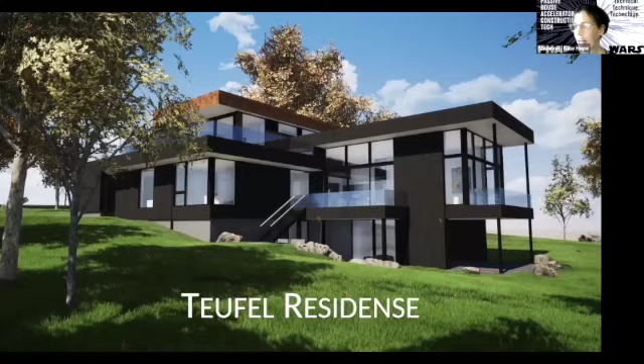Anyway, so this is the Teufel residence. This project started, I guess, about a year and a half ago or so.

And the client who originally came to us was from California and wanted a sexy, modern Southern California design, not typically done on the East Coast or somewhere where you actually need to heat a building, in Pennsylvania. And so he reached out to us because of that image you saw earlier, which was a past project that was not a passive house, but we still implemented passive solar strategies, even though it was a ridiculous amount of glass.

But anyway, so the Teufel project, the main driving focus here was modern, innovative, sexy design. And so that's what the client came to us for. And we slowly started the sell on sustainability, energy efficiency, comfort, durability, and really thinking bigger than just the simple strategy of sexy and modern. And so our goal was to take that sexy modern strategy and turn it into something that was passive house or something close to it when we first started the project.

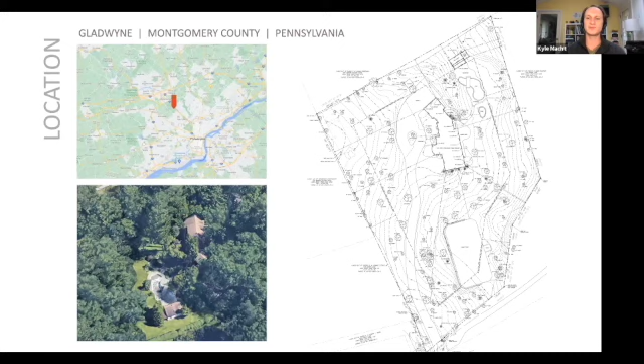And so this project is located just west of Philadelphia, sort of northwest in Gladwyne, which is somewhat of a wealthy community. And the client found a piece of land there that had an old large home on it. And that home was kind of nice, but nice from the 1970s. So we were first brought in to look at that existing property and that existing home and sort of evaluate it: is there anything worth saving? Is there anything worth considering differently here than just tearing this down and starting over?

The client fell in love with the site pretty quickly. Fortunately, all these pictures are from fall, so when it's all green and beautiful, it looks a little bit nicer than this. But anyway, so we were first brought in for pre-existing conditions, and then I got to throw on that energy consulting hat that I started with Norm, who's in the audience. And so I was able to go in, sort of dissect this house, and pretty quickly come to the conclusion, all right, there's a lot of water issues, that musty smell as soon as you walk in that door.

It's going to take a lot of work to try to revamp this to make it the modern palace that the client wanted. Maybe take it down to the foundation, but the more we analyzed it, the more we thought it wasn't worth it. And what we decided to do instead was deconstruct the home. So we had multiple different parties come in, take out what was salvageable, strip and gut the whole inside, and then deconstruct it appropriately and recycle what we could. And that ended up being a big tax write-off for the client. So even though it took a little longer to do that, it was worth it.

And then we were brought on in full architecture mode for the preliminary design. And so in this process, a lot of time to explore. This client was great because he gave us that flexibility to really try different things, try different designs, got out some foam blocks and really played with a lot of different ideas. And then from there, we went to schematic design. And this is where we started really thinking about how are we going to execute this? How are we going to get to somewhat passive house-ish, I keep saying, and get closer to that.

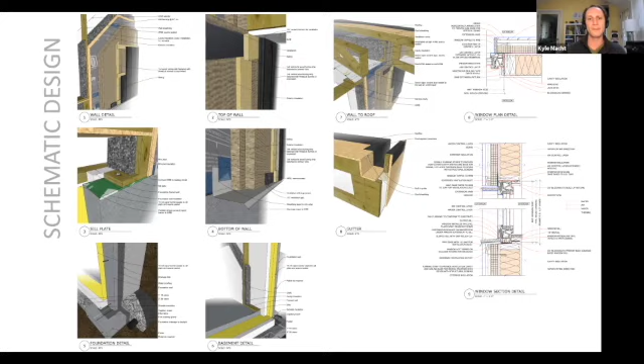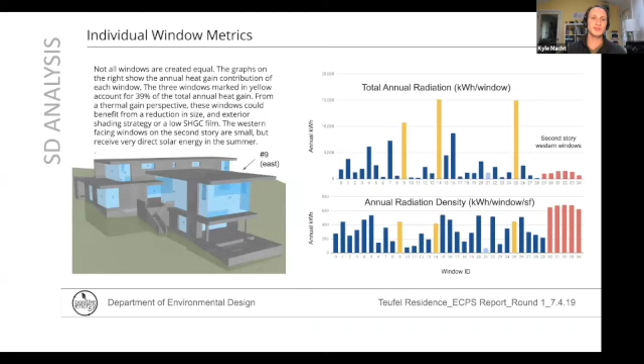At this point, we also brought in Positive Energy, who were the mechanical and plumbing engineers on this project. And they did a whole bunch of different studies for the project, looking at how the trees impact the windows and shading analysis, insulation, looking at glare studies and all different types of lighting studies. And so they were really helpful to try to fine tune some of the project to make things work and perform a little bit better. Luckily, from our past experience, we were getting pretty close to that optimal performance, and we could have tweaked a lot more things, but to get the design the way we wanted to, we were pretty close. But they were really helpful.

And so getting into design development, we've got this amazing project, and the more people we're bringing in, at this point we had Hansen on as the main builder, and we really wanted to make this project something better, something more unique, something more progressive. And so talking to the client about embodied carbon, the client was all for it, but wasn't really interested in paying that much for it. And so how did we manage that? How did we try to reduce the embodied carbon as much as possible without increasing the cost too much or at all? And so that was one of the big things we started talking about.

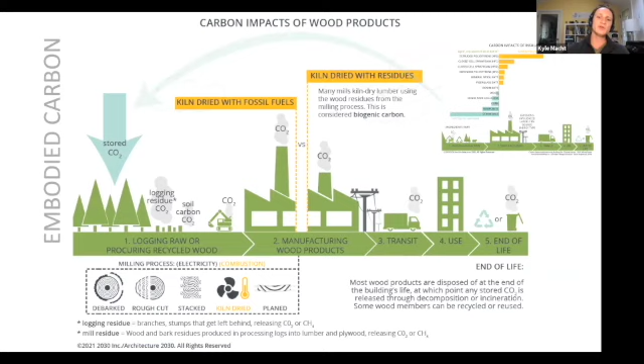And we went to the Passive House conference in DC, I guess that was a year and a half ago or a year ago or so. And in that same room with us was Steve and Ilka, and they did a presentation on embodied carbon. And we were interested in potentially working with them and bringing a panel manufacturer in, which I'll get on in a second. And so that presentation was sort of like, yes, we really need to think a little bit more progressive about this.

And so the conversation came up from a builder and from us and the client. Everybody sort of seemed intrigued by, what if we panelized this? What if it was all built in the factory and brought on site? And so one of the main things that really got me excited about that was carbon reduction. And so we looked at, what if we panelized it? What if we built it on site? And we had a lot of trouble getting FSC lumber from different local sources, even shipping it in. It was either really expensive or difficult to source. Going panelized, super easy.

Most of the people that we were talking to about the project could do that, and it was part of their process. Wood fiberboard, also part of the process. That was something we wanted to start doing instead of the mineral wool, to reduce carbon emissions and still allow that vapor drive or vapor drying to the exterior. And so we really started getting interested in this.

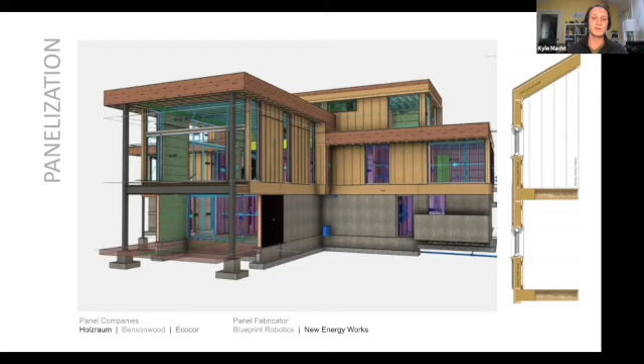With this project, we ended up using hemp batt insulation. And then on the outside, a 60 millimeter Steico, the wood fiber board, and then a double layer 1x3 lattice structure. But in between those, we have Solitex Mento Plus for extra durability. And so that is being fastened on with the lattice structure.

And then we have a vertical Accoya wood Shou Sugi Ban siding for extreme durability. That should be a 50-year product. So we are thinking sort of long-term in terms of our material selection there. And the client was also thinking very much about the aesthetics at the same time. So how did those marry together?

On the inside of this, we had our ZIP sheathing, and that is our main air control layer. The Solitex Mento Plus is our secondary air control layer. The ZIP is really our vapor control layer as well, acting as a vapor retarder on the inside, slowing that moisture drive through into the wall assembly. And then if there is any moisture that gets in there, it can all dry to the exterior. Inside that, we have a 2x3 service cavity running horizontally with 5/8 gypsum on that.

So the other big thing, what do we do with the foundation? Concrete. It's so carbon intensive. And so we really started looking at what are all the different options? Do we panelize? Do we do something crazy? And that something crazy usually was not working out. And so we were looking at a lot of different ways. What if we remove the slab in the foundation?

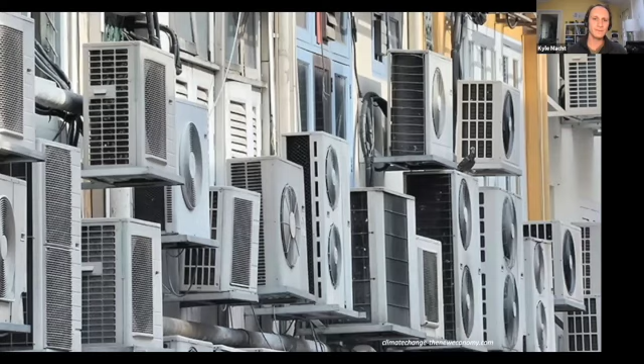The last one, at that same Passive House conference, the next presentation was about refrigerant usage and how super carbon intense it can be. And so we started thinking about that. And in that same room with us were our mechanical engineers, Positive Energy. So the panel company, mechanical engineers, the architects, all in that same presentation, watching that together. As soon as it was over, like, this is the project. We need to do something better here.

What are our options? And the other thing, the eyesore of this, that's why I chose this photo, because it looks ridiculous. And so we were trying to figure out, with a 6-zone mechanical system, how do we do this so we don't have condensers all over the place? Or maybe we needed to create a mechanical pen.

And so all of this started leading us to ground source heat pumps, the thing I normally have been steering clients away from for the past 10 years or so. I think the last one I did before this project was with Norm from Infinity on another project. Anyway, we did some at Infinity with ground source heat pumps. And so we decided to use that for multiple reasons.

One, the big one, all the refrigerant got contained inside this box, factory installed. So instead of a 10% leakage assumed per year, which would outweigh our carbon emissions from the embodied and the operational by a lot. I'm looking forward to finalizing those numbers and that embodied carbon calculation and the whole life cycle calculation. But the refrigerant usage ended up being the biggest carbon emitter for our project.

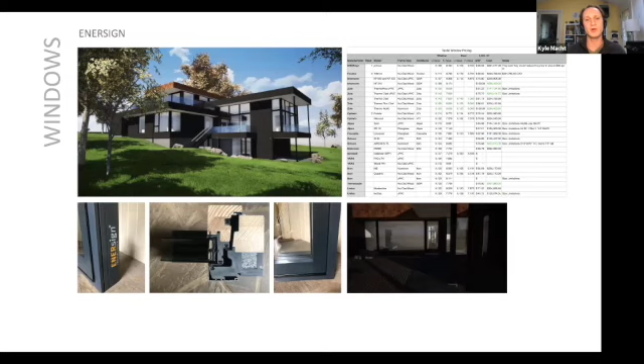which was definitely on the high end, but that was comparing a lot of UPVC and different other, some fiberglass, but most of the wood aluminum clad were in a similar ballpark in terms of price. So we were really happy with this product. I'm really looking forward to installing this. So getting into some of the details, that's what I was really hoping to dive into here.

So at this wall, the other nice thing, we were sort of looking at Superior Wall or IBS. And so with Superior Wall and some of IBS's walls, there's extra steel studs in the wall, and there's XPS foam. And once again, we're trying to remove carbon emissions, and EPS foam is cheaper. So in this scenario, we used all EPS foam throughout the entirety of that panel.

And then for fire purposes and service purposes, and to get a little bit of extra insulation, we're putting all the service cavity insulation on the inside there too, in that 2x4 wall cavity. And we're pulling that off the foundation wall just a ½ inch or so to get a little bit of cellulose back there. And so we're really interested and excited about this detail.

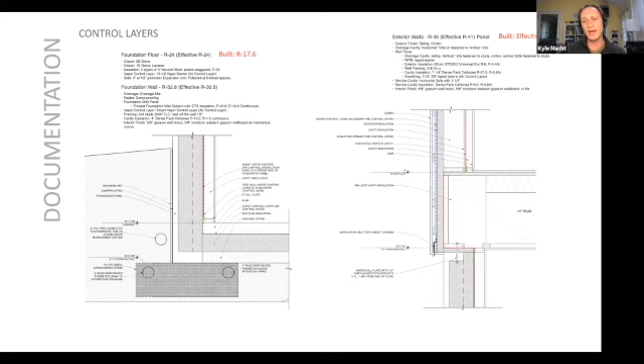So we're really excited about this detail. We'll be executing it soon. And I'm excited to see how that one turns out. The other scenario that we had was on the other side of this foundation. It's mostly a walkout basement on this side. Other side, we have grade going up close to the first floor and up to first floor in some circumstances.

So in that top right image, we realized once you get rid of that floor insulation there, you really got concrete, double sill plate, subfloor, and then bottom plate of the wall above. Sort of a big chunk of wood as a huge thermal bridge there. And so what we decided to do was put 1.5 inches of type 9 EPS underneath that sill plate there, just a continuous layer around the entire top of the foundation wall.

I was talking with the builder, he was like, let's just do the whole thing. It's gonna be way easier to communicate. And so that's what we decided to do. Underneath where all the point loads are coming down, we worked with our structural engineer to figure out which version of Armatherm made the most sense. So we have a little bit of extra coordination here, but completely thermally broken around this transition, which might be a difficult one.

Roof system. This was another one that we really struggled with on this and multiple projects. We have 2 flat roof projects at the same time. And 475, I've seen a lot of their presentations on how to achieve this. Passive House has other ones. And so our goal was to not use any foam inside the control layers, inside our air control layers on the underside of this roof cavity, but the whole cavity insulation is all cellulose. And that was what we were trying to achieve. On top of it was a sloped tapered polyiso.

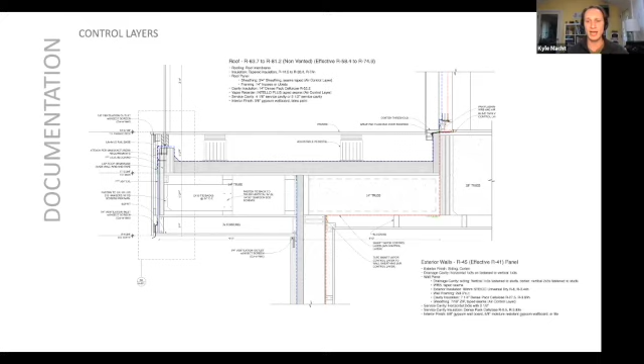We did look at what if we didn't do that and tapered the trusses or tapered the I-joists, which they ended up being, and looked at different strategies there. But after doing some modeling that Ilka was instrumental in helping us out with, doing different WUFI scenarios, these WUFI models were actually done by PHIUS themselves. And this is another little tricky part that we got into, of what membrane to use on the underside of those I-joists there. And so we started out with Solitex or Intello, and that seemed to be what it's designed for. That makes sense. We have tested data from past projects, not ours, but other ones. And then we've also seen a lot of WUFI modeling done.

However, PHIUS changed their modeling methodology, and now they do it just slightly differently, which changes the product selection. And so from their new modeling methodology, they had concerns about the variability of that vapor control layer of that Intello, and they thought it was too vapor closed to allow enough moisture to dry down, because we're relying all on downward drying potential. Some of our roofs, we can rely on solar drive, some we can't. We have a PV system up there, as well as some roof terraces. So we're really relying mostly on drying to the inside.

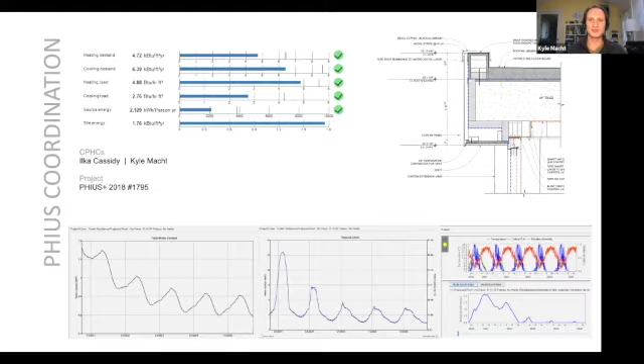And so they wanted us to use more vapor open material. We're still trying to figure out exactly what that's going to be. I'm still thinking Intello makes more sense, but in order to do that, we need to do some other things. So real quick here, we were also looking at how do we extend those overhangs? How do we deal with overhangs? And I'll get more into that in a second.

Window installation, that ended up being a big one back and forth with us and Holzraum and the builder. All of these windows are going to end up being installed on site. Definitely a little bit of a downside, but we were really excited about the possibility of installing them in the factory. This is the typical detail. These are all the non-typical details. Most of our windows actually go floor to ceiling or wall to wall, and they're actually not in a panel at all. They're their own wall panel. And so those we're going to be installing on site. So we talked about all the different coordination, who's going to be doing what, who's prepping what, and how that's going to be achieved.

The other scenario, what do you do at the bottom of the window? So what we've decided is we are going to tape that, and we're going to rely on drying only through Tescon Vana tape at the bottom of that window. That seems to be more the European methodology. Building Science Corporation might poo-poo that, but we're using a really high quality installation, really high quality window here. If there is any moisture that gets down there, it will be able to dry. If there's a leak, that will not be able to drain as easily, but I'm not too worried about that.

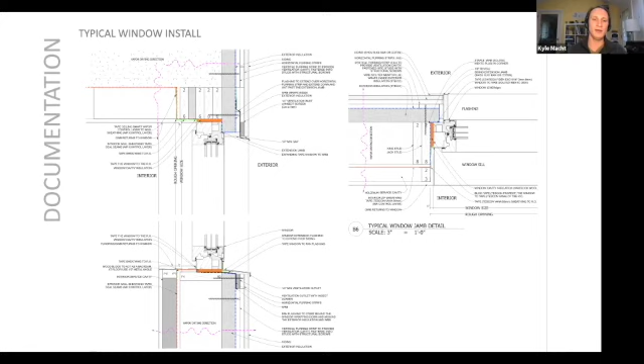Another reason why, we have 4-foot overhangs meeting this window in most scenarios. You can see that in the bottom right there. Most of the time, our windows are going up to a soffit. And so there's really minimal chance for a lot of water penetration in these windows. Where we are having a window without an overhang on it, the plan is to maybe put in a vapor diffusion port or a little drainage port, sort of like a weep hole that we're taping around, to allow that excess potential water 50 years from now to drain out.

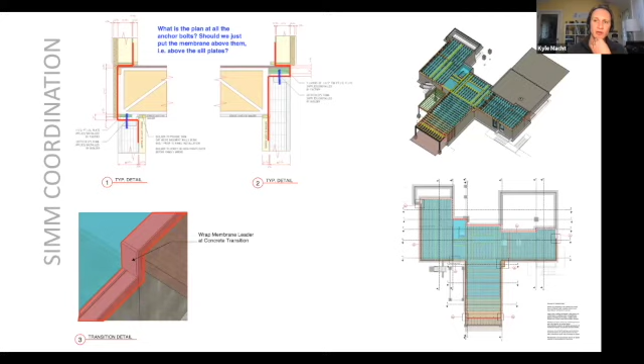And so working with Holzraum, they went through their entire process of how are we treating all these details? How are all these different systems connecting? Where are all those control layers connecting? And so Ilka was instrumental in that, and so was Steve at Holzraum. And so we worked together pretty thoroughly on all of these details and figuring out all of these different conditions.

This was another one that sort of came up, is how do we do all these big overhangs? How do we deal with those penetrations in our control layers? And so we were worried about thermal control layer, air control layer, vapor control layer, and the water control layer there. And so water control layer we're bypassing, and that's wrapping around the parapet, and around the overhang there. But our primary air control layer was on the inside, on the underside of our roof system. So that was bypassing any type of point load through it.

However, our secondary air control layer was the roof sheathing, and that can carry down to the outside of the Solitex Mento. So how do we seal between where 2 layers of LVLs are coming together? Do you core and fill? Do you squeeze some Contiga between those, some type of acoustical sealant? And so that's what our plan is to try to seal right at that penetration.

Secondary air control layer, but still a concern, still something to keep in mind. Other option was to tape around the entirety of that LVL protrusion there and sort of include the whole thing. But our goal is to just try to fill between there. We'll see how that works out in the blower door test.

Also, a little bit of steel in the project. We've really tried to limit the usage of steel. We have basically just 2 steel beams left and 1 steel column. Everything else we were able to get down to wood. When we first started in schematic design, there were like 10 steel beams in the project.

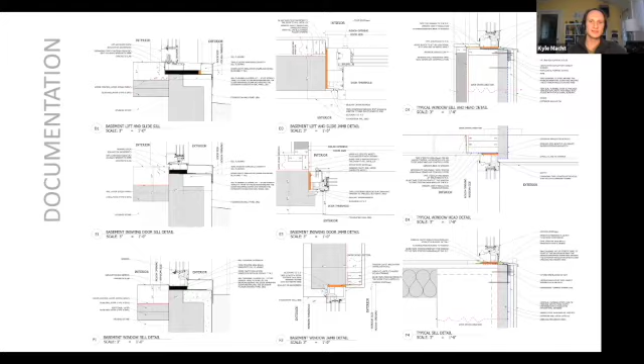We knew this one was an issue, and this one was the one we were just going to say, it is what it is. We'll throw a little bit of extra insulation potentially underneath that double LVL there. Some places it's not quite a double LVL and it's a little bit more, so definitely a concern. But we're gonna make sure we mitigate that as much as we can.

I wondered because it looked like from your thought process you were identifying these and approaching them before you probably were asked to look at them. That's absolutely correct. This exact condition I was thinking about in schematic design, of how we're dealing with these thermal point loads, especially the overhang. And in all honesty, we had another project similar to this that we designed right before this, not passive house, but going close to it. And so we were dealing with some of those conditions here.

So we were sort of primed for this in this project, of how are we going to deal with these big overhangs and how are we going to do it in the best way we can to not increase cost, make it not too complicated, but also make sure it's not missed. Sequencing is super huge in this type of condition, and making sure that's not skipped, because if it is skipped, now we've got to rely on taping on the outside. So sequencing is super critical. Kyle, can you go to the photo of the EPS preformed foundation?

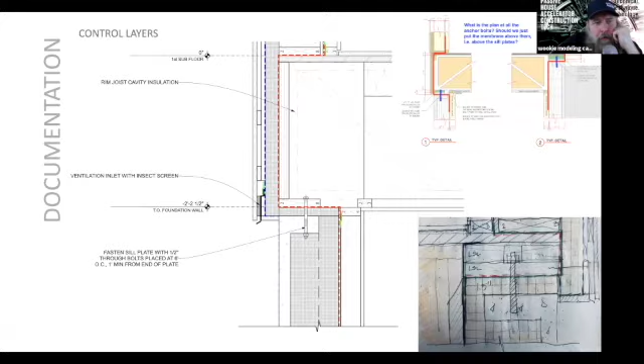Thank you. Yeah, those panels are being manufactured now. They're halfway to two thirds. Steve can update us if we need. But we're hoping that a month from now, there's a big core and shell on top of this foundation. So it'll go up pretty quick, but it'll take a little bit of time to do all the different layers. But the floor pieces are all panelized, so those will come down pretty quickly. And that was one of the main reasons for that, to speed up construction.

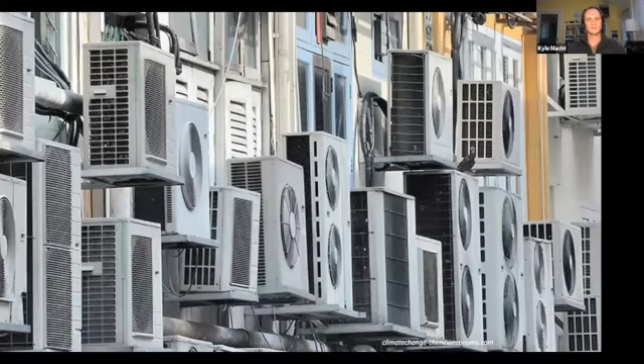And they were curious about the name Twofold. I actually noticed that Ilka answered this question in the chat, the client's name. But Kyle, you mentioned it's pronounced differently and it does have a meaning. Is that right? I don't remember what the meaning is actually. Ilka would know, but Teufel is actually, I guess, the real pronunciation. But they changed it at some point a long time ago, and so that's the way it's pronounced, our Americanized version. It means devil. Does it really? Yes.

I actually asked the question. Sorry, I logged in with the wrong account. Ah, thank you, Sandra. Welcome. This client was certainly not a devil, but one of the best clients I've worked with. So the combination of devil and power, like Teufel and Macht. Yeah, pretty cool. Devil and power. The devil's in the details. Thank you.

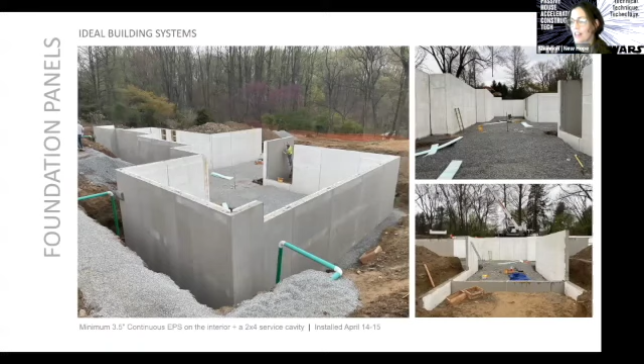All right, our next question is from Han Solo to everyone, actually more of a statement along the same lines, that you don't need to disguise, Kyle, because your last name means force in German.

So Trevor Fedyna, am I pronouncing your name right? Would you like to unmute and ask your question, or I can ask it for you? I was just curious if the original house had a conversation pit in it, because I have a weird affinity for those.

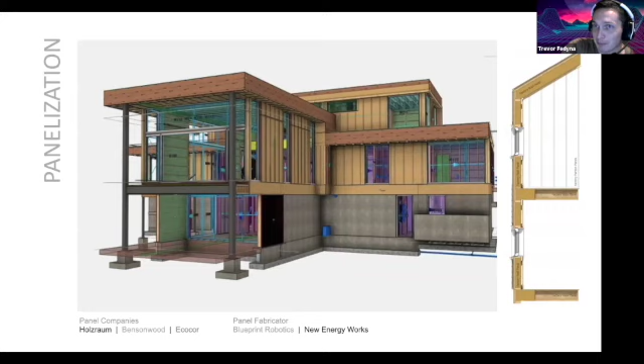I don't know. It was not that desirable, this place, so we were happy to get rid of it. We did have to go a little bit deeper. The one big question was, this was sort of like a split level as you entered, and so that was a big decision of where do we put all these elevations? So we worked heavily with the landscape architects trying to figure out how we want to do that, because the client was more interested in walking right in. So we did actually dig a little bit deeper and use that digging, I believe, to fill in the pools that used to be there.

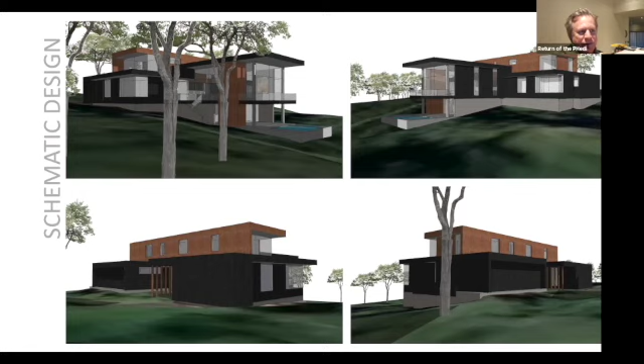Cool. Thank you. Thanks, Trevor. Trevor, you win the award for the most technical question of the evening, by the way. So Harvey's up next, but Harvey, I think you had 3 questions. Maybe kick us off with 1. Well, I'm just going to follow Trevor and just ask, was there shag carpeting on the walls? That would be the first one. I mean, that conversation, I don't think that was the night. I think, Mark, that was the best question ever. I think Dr. Feist is rolling right now in bed over that question. Sorry, I got to ask the Harvey question.

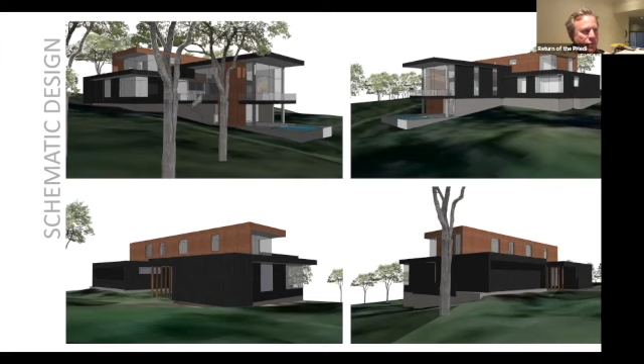What is the budget for this bad boy in total? That's a great question. Budget here was like $2.5 million. And it started at 5,000 square feet of house and 1,500 square feet of art barn was the original ask. And so we ended up saying, hey, you've got this giant basement. Maybe we should be putting the art barn in the basement. And so that's sort of how that formed.

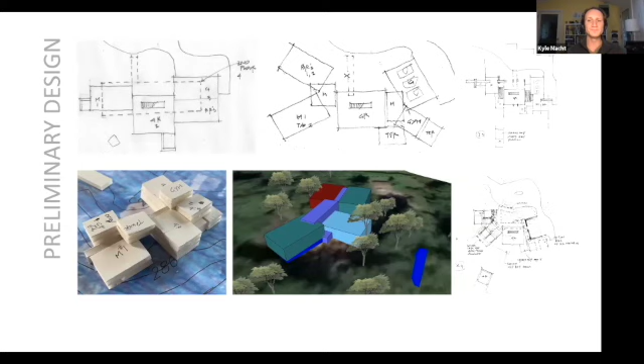And then we were talking about, by doing that, maybe we could create some interesting interconnectivity from the house to the art collection and let it start bleeding out. So a big portion of the basement is a huge art gallery. So it's not 8,000 square feet all above grade. That's including the entire basement, including unfinished space.

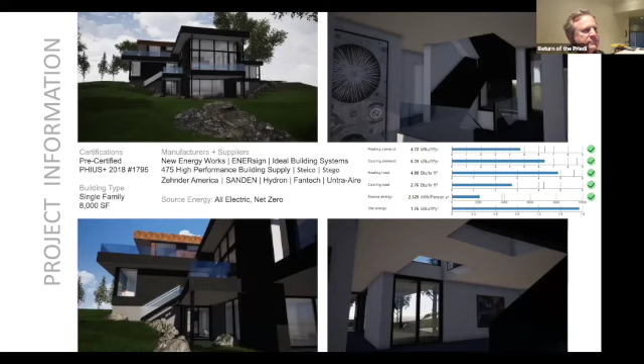Incredible. So I started out at 2.5 million at this stage. It crept up to 5.5 million, and we got over 6 at one point. We made some design decisions, really just some smarter detailing to simplify a couple things. We're down to 5.5, maybe 5 by the time we're done. So about $1,000 a square foot to build above grade? Is that what you'd say?

Well, the total square footage was about $800 a square foot. The core and shell was a way smaller portion of that. Mechanical systems, I said, was about 240,000. All the MEP was maybe $1 million together. And then core and shell and windows was like $1 million. And then the rest was all finishes.

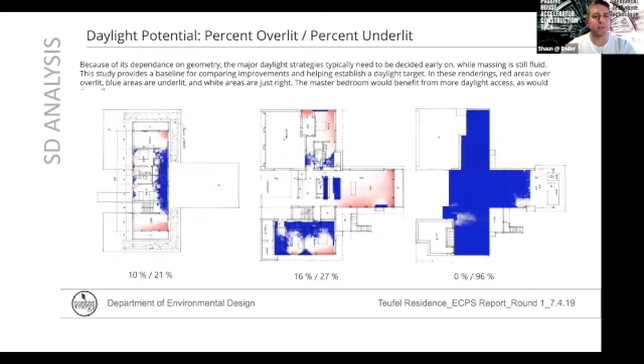Finishes was what drove the cost in this project, and that was completely the client's decision. I think he really kept things clean and simple on the inside, but definitely went for some nicer things. Hey, Kyle, I got to jump in here. So technically, this would be the first certified Passive House art gallery in North America, correct? I guess, sure, why not? Yeah, I think that's it. He does plan on having actual exhibits here.

So then what kind of finishing, because I don't think you showed a lot on the inside. It's not just basic drywall? It's just basic drywall for the most part, skimmed. Level 5 finish. But the cabinetry is expensive. The lighting was expensive. We didn't want to go too crazy with the lighting; we did simplify that a lot. COVID is expensive. That has brought up the price a bit.

Windows was in the mid 200,000s. It was a lot of railings, and the exterior, the rusted mild steel, was kind of pricey. The Accoya wood, shou sugi ban, was about $18 a square foot. So it all adds up. The site work was a lot. So demoing the existing home, dealing with all of that, we had to go through an insane permitting process because we were disturbing over an acre.

So there was a lot of involvement in that. So the site work itself was a huge cost of the project, like 500, 600,000. I forget exactly what it ended up being, but it all added up a lot. And there was about $1 million that wasn't the house, was all of the other stuff besides just the house.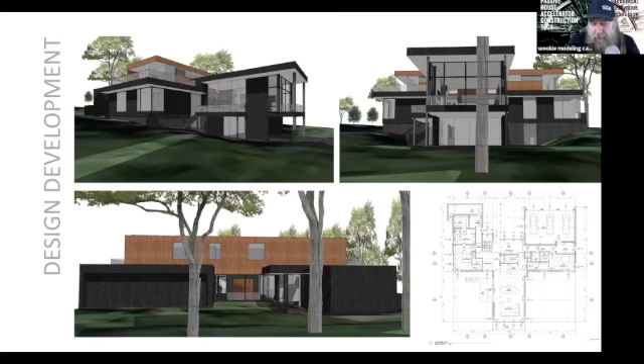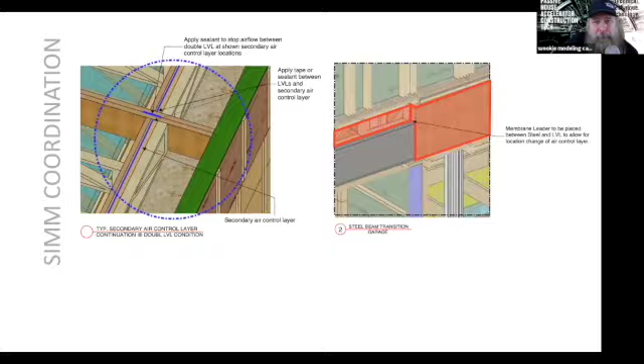His master's thesis was on passive solar design. Most of the people that he was presenting to thought it was all symbolic or conceptual, and that it wasn't to do with energy efficiency or anything besides that. It was all architecturally symbolic. And so, no, he was one of the pioneers in this. So I'm sort of second generation energy nerd, I guess.

And so I started wanting to be Tony Stark, or sort of design weapons and cars and be a mechanical engineer. I wanted to do that since I was 5 years old. Started at Penn State as a mechanical engineer. And then after freshman year, I started really falling in love with modern architecture. I saw all of this incredible architecture over the years with my dad, him taking my brother and I and my mom to all these different places.

I couldn't care at all. I was dealing with all the other stuff and exploring other things and seeing all this amazing, beautiful work. And it wasn't until later in life that I started respecting it and loving it. And so I had some friends in college that were in architectural engineering, and I really liked their homework assignments better than my own. And so it was really the involvement in that made me switch to architectural engineering. At this point, I became an intern at Paul Macht Architects, the old name of the firm.

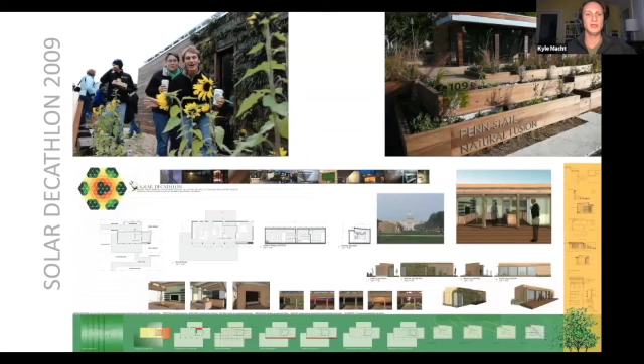And then 2009, I was pushed in to be the team leader. So we had about 200 students below me, really a core team of 16 students there. And so that was a lot of fun. My wife was involved in both solar decathlon projects. And so this project, we actually built a secondary home on the Northern Cheyenne Indian Reservation of straw bale construction. So we built a technical core, straw bale, other side, and sort of built the two together, and I helped manage that project. So back in college, I was doing all of these crazy innovative projects. I didn't know what standard construction was back then.